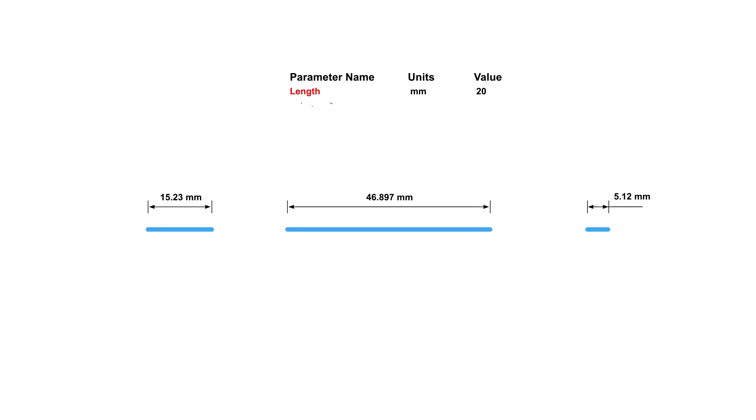Parameters are a powerful toolset that can be used to drive and edit multiple dimensions from one single named parameter. You can create predefined parameters with a value, then assign that one parameter to multiple dimensions, as opposed to individually set values. One benefit of this is that you only need to edit the one parameter value, and any changes will propagate across all dimensions with the same reference. Let's explore this in a bit more detail.

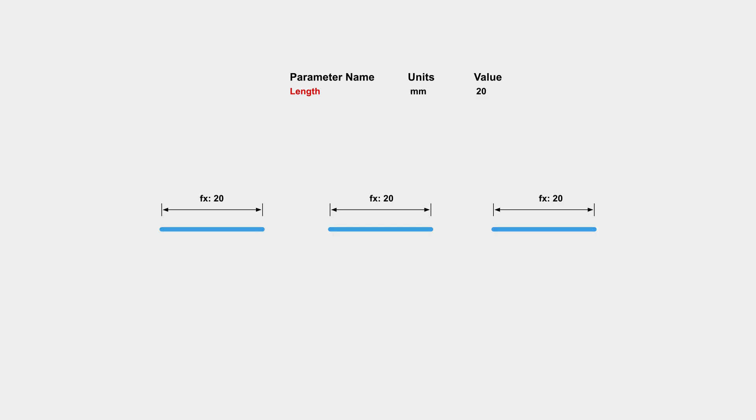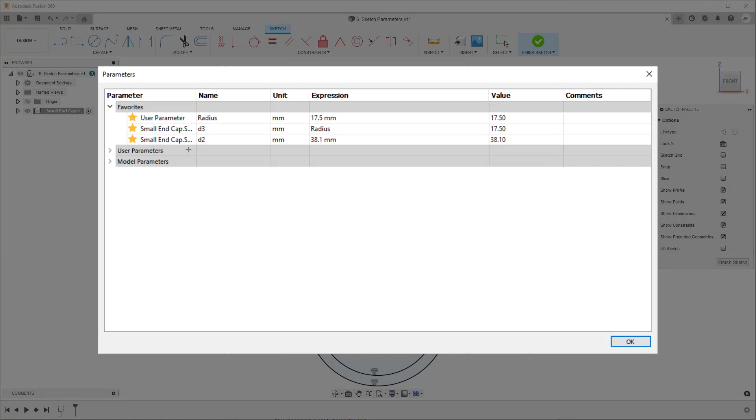To access the Parameters dialog, go to the Modify drop-down and select Change Parameters. Once the dialog appears, you will see we have three options: Favorites, User Parameters, and Model Parameters. Favorites are commonly used parameters that you want to access quickly. For a more complex design, these can be particularly useful.

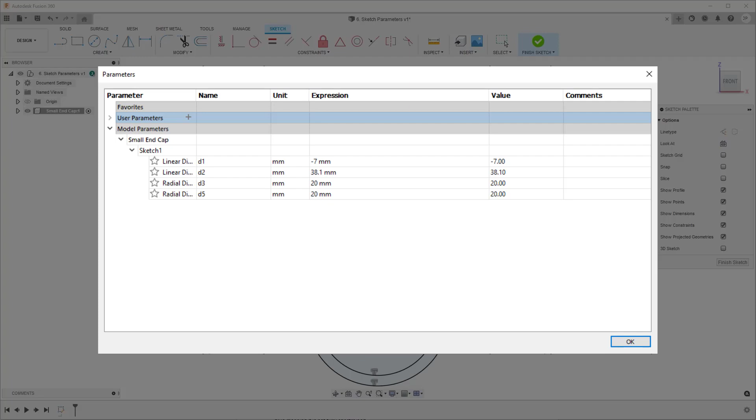User parameters are those which are created by you, the user, and if you already have some known dimensions, you could start populating these before even creating a sketch. Model parameters are those which are automatically generated when you create any 2D or 3D geometry. And if you expand this drop-down, you can see there are expression values which match those created in our design. To exit this dialog, press Escape on your keyboard or click the OK button.

In this example, you can see the dimensions placed on the sketch, and to edit these, you just need to double-click on the dimension, enter a new value, and press Enter on your keyboard. If you have dimensions that are specific to certain geometry, then simply entering a value here is a reasonable workflow. However, if you have multiple geometry that shares a common value, potentially across multiple sketches, then this is where you may find parameters a more useful tool to use.

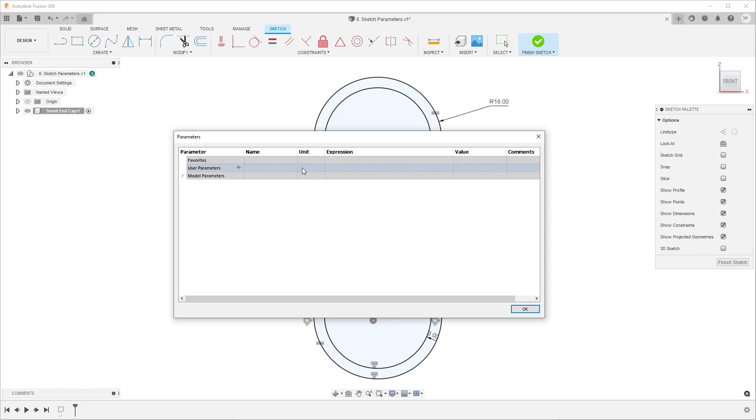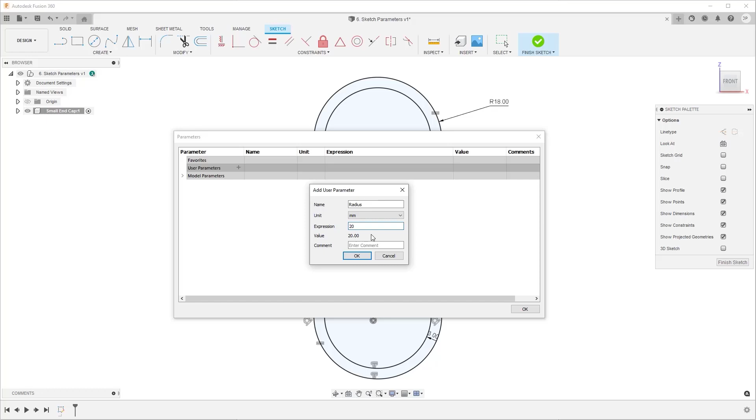Go ahead and open the Parameters dialog box once more, this time by pressing S on your keyboard to bring up the search dialog, then typing in Parameters and left-clicking on it. Next to User Parameters, click on the plus symbol to open the Add User Parameter dialog. Here you can enter a memorable name, the units, and the expression or value you want to use. Enter a name, leave as millimeters for now, and put in a value in the expression box. Then press OK. You can see the parameter has now been populated in the User Parameters section, and you are now ready to start using this in your design.

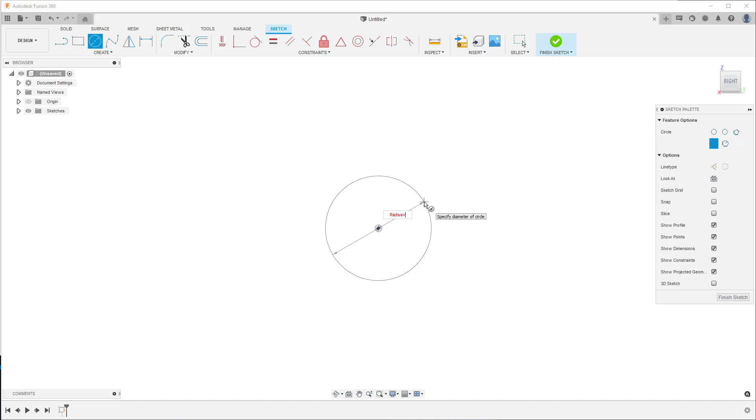Finally, one further way to create parameters is directly in the sketch environment itself. When creating a sketch feature, if you enter a parameter name in the dialog, followed by an equal symbol, then the value, after you press Enter and head back to the parameters dialog, you will see this parameter automatically favorited from the model parameters section. This is useful if you want to quickly set and name parameters on the fly whilst modeling, without having to continuously enter the parameters dialog.

Press OK or Escape on your keyboard to exit the dialog box, then double-click on the radius value set on the arc to edit it. Here you can start to type any character that is in the user parameter just created, and you will see it populate as an option. If you select it, you will see the name appear in the dialog and turn black, indicating that this is a valid parameter. Press Enter on your keyboard to confirm.

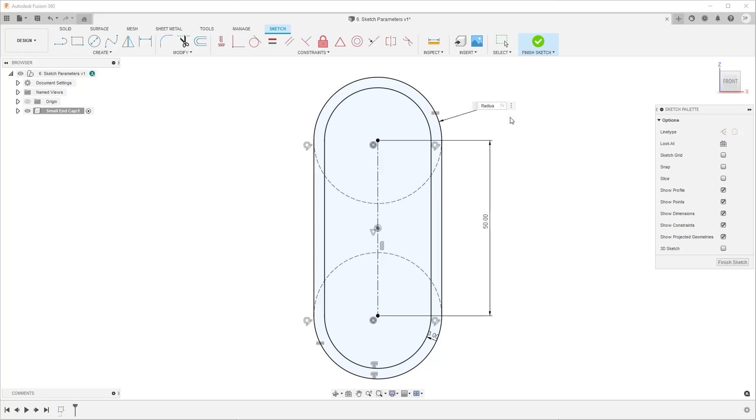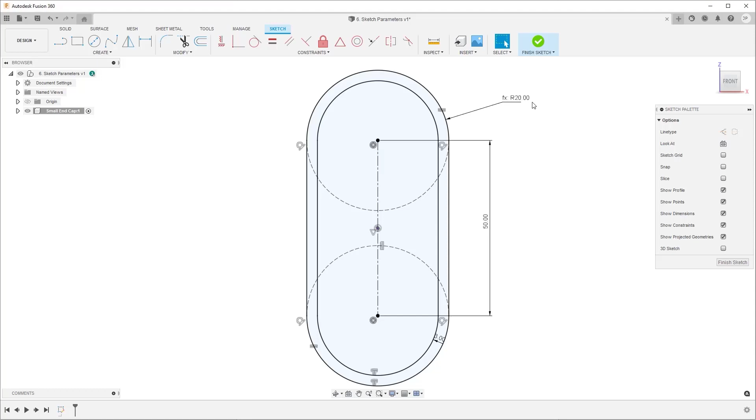The dimension has now updated to match this parameter value, as opposed to an individually set value, which is confirmed as you see an fx preceding the value. To also confirm, if you double-click on the parameter, you will still see the parameter name and not the actual value. Open up the Parameters dialog box once more and edit the value by double-clicking on it, entering a new value, and pressing Enter. You can see how the geometry is updated without having to enter the dimensions on the canvas.

To show how this might be useful, let's go back to the canvas and edit the sketch slightly. You can delete any constraint by selecting and deleting, and when these are deleted, the sketch turns blue, meaning it is not fully constrained. Open up the Dimension tool by pressing D on your keyboard, then select the arc. Now, enter that same parameter name you just created and press Enter. You can see the same fx expression with the value next to it.

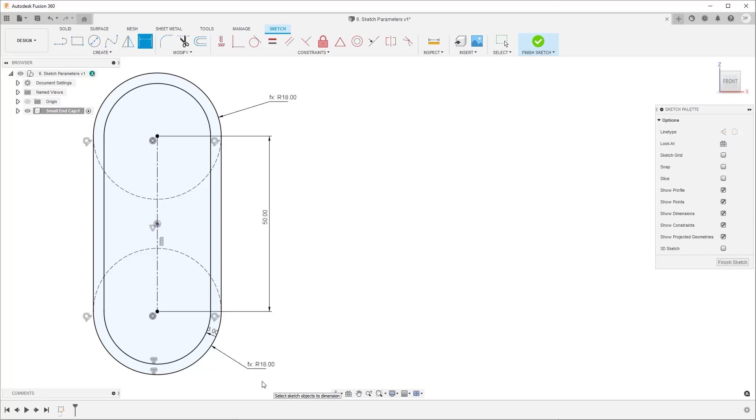Go back into the Parameters dialog box once more and change the value. You will see how you only need to edit one value, and any dimensions with that parameter reference will update accordingly. This is particularly useful with more complex assemblies, but hopefully you can appreciate how much time and effort this may save going forwards with your designs.

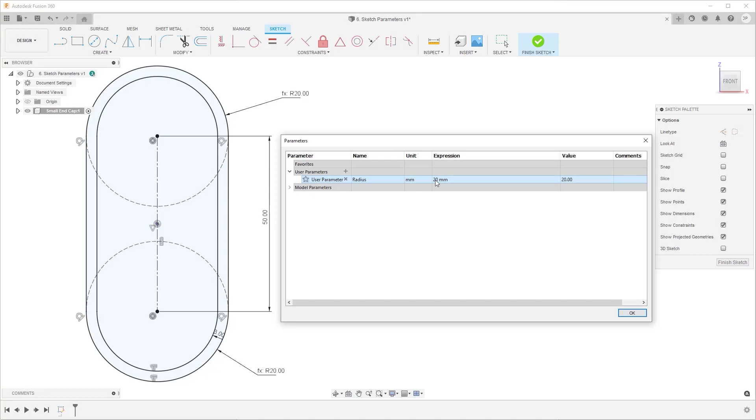Now you know how to use the sketch parameters to drive a parametric design in Fusion 360.